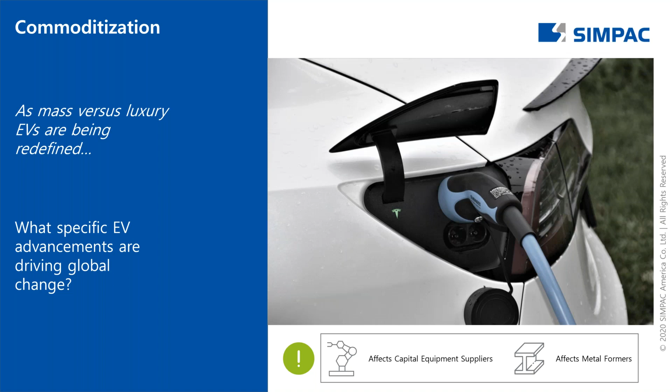Now that we've talked a little bit about how companies are working on different technologies to maintain and/or increase their profitability, we'd now like to discuss the commoditization of the EV market and what specific advancements are going to be driving this change.

GM currently has an EV Bolt with an MSRP of a shade over $37,000. Toyota, while not a complete EV vehicle, has a gas-electric hybrid. It's called a Prius, and it runs around $28,000 to $34,000.

Now, quite honestly, I use the example of Toyota more so because my cousin, who lives in Arizona, owns a Prius, and he told me that he's already driven over 300,000 miles on his car, and he quite literally only puts gas into it about every 3 to 4 months.

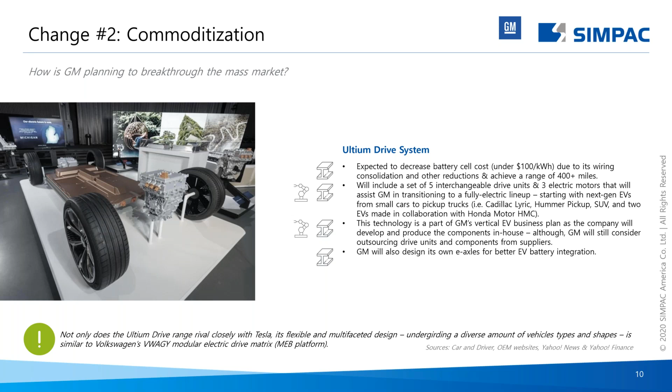So the next point we'd like to talk about is production ramp-ups. And yes, here's where we talk a little bit about Simpac and their press technologies related to the EV market. This section is important to me, obviously, and hopefully is as well for the metal forming industry, as we will now discuss a little more about how the stamping market will change over the next 5 to 10 years because of the changes that are happening to the EV market.

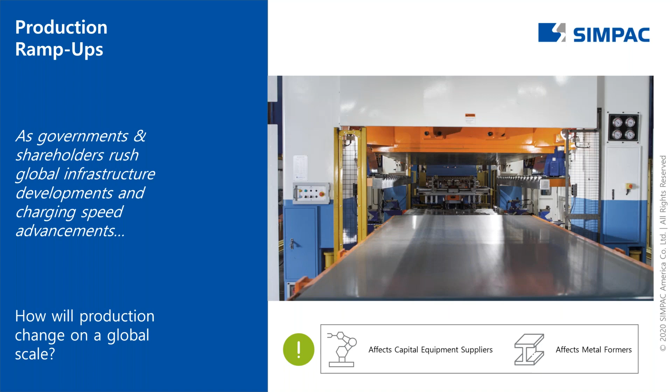Now, before we start talking about the production ramp-ups that are and will be happening everywhere, I'd like to take a minute and recognize our partners at D&S, located in Hastings, Michigan. Mike Stout, president of D&S, was nice enough to give us a quote as to what he sees in the market when it comes to the future needs of the stamping industry, not only for the EV market, but for the overall market as a whole, especially when it comes to stamping of higher strength materials and/or aluminum. Now, once again, I'm going to take a small break here so you can read Mike's quote.

Also, one thing to note, in a couple slides here, we're going to talk about larger presses and press lines. Due to space constraints, one of the larger presses that we're talking about is obviously Simpac's next generation SV4P2000 servo press. And that you see as a picture right next to Mike Stout's bio.

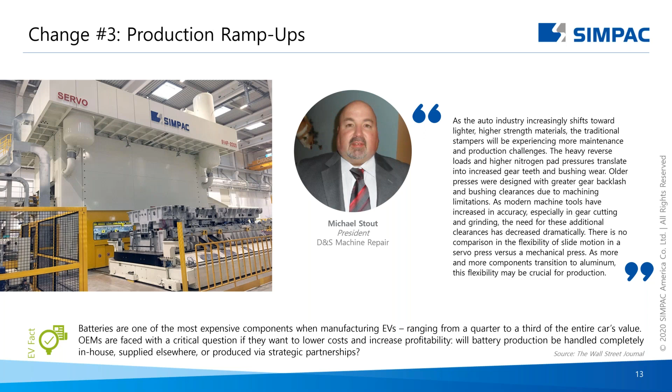Due to NDAs in place, we're obviously not at liberty to discuss who has purchased these lines or how many have been purchased by whom. But we are able to say that since our first webinar, the number of what has been purchased for the North American market has been considerably larger than anticipated or, for that matter, expected. And the standard line mix that we're seeing is ranging from 300 to 500 tons for a press line.

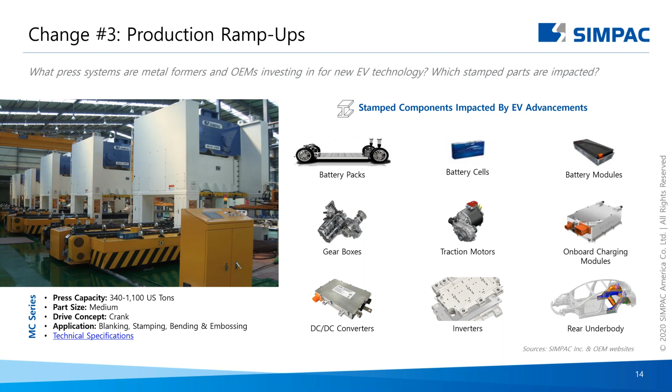However, many companies are using a different model, a hybrid model, by stamping higher and higher strength materials and/or aluminum. And as such, higher tonnage presses, either as a standalone press or press line, are going to be needed. This then exemplifies the need for either standard mechanical or servo-driven presses to accommodate these existing and/or future needs.

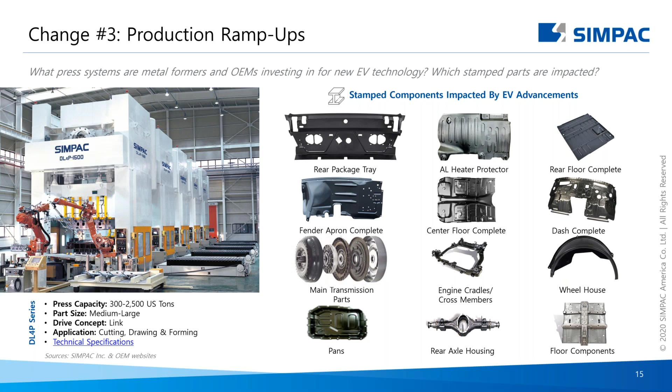Now that we've talked a little bit about what types of presses companies are currently purchasing from Simpac for the North American market, we also want to highlight some of the OEMs, either automotive or battery, and what they are doing to be able to ramp up their production in order to meet future demands. First, let's talk about Tesla. Elon Musk is hoping to eventually produce 20 million vehicles per year globally. In order to do that, he started to work on putting multiple things in place.

Expanding on our first presentation, GM's commitment to invest $20 billion over the next 3 to 5 years in EVs, we can now see where some of these monies are actually going. $6.7 billion is going to either upgrading existing brownfields or building greenfields over the next 2 to 3 years. We have the potential purchase of an 11% or more stake in Nikola. The dollar amount and percentage of ownership is obviously still TBD, and hopefully things will become clearer by the beginning to mid of December.

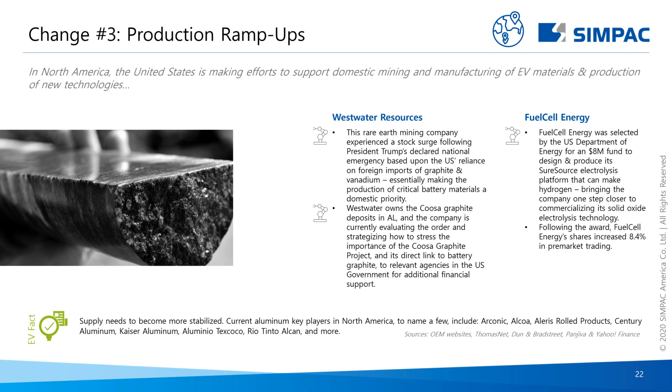Now that we've touched on some of the different types of production ramp-ups we can expect to see in the coming months and years, let's talk a little bit about the sustainability and eco-friendly processes that we can hopefully expect to see with this shift to EV. Now, even though we only have one slide allocated for this section, this is by far one of the most important sections when thinking about the EV market and to a greater extent, energy independence for North America.

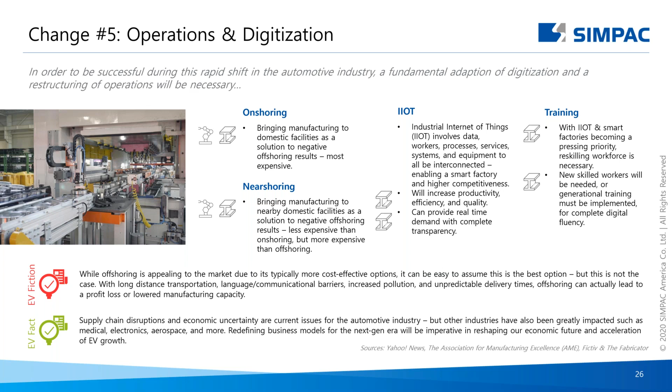Sorry about that. Let's first talk about COVID-19 and what this has at least taught us here, or at least myself, at Simpac. First of all, we had multiple buy-offs that were happening in Korea during the beginning of the shutdowns, obviously March through June of this year. As such, we weren't able to be on site with our customers to review the equipment for buy-off. This forced us to focus solely on a non-human interface/interaction in order to make sure everything was properly bought off before being shipped to North America.

Now, to say this was a challenge is definitely an understatement, but we succeeded. And with each new buy-off, we have become more and more efficient. Now, what does this have to do with the younger generation, you might say? Well, Generation Z and the Millennials account for 48% of the current workforce, and that is only going to increase over the next years. These generations are more tech savvy and more inclined to look outside the box when thinking

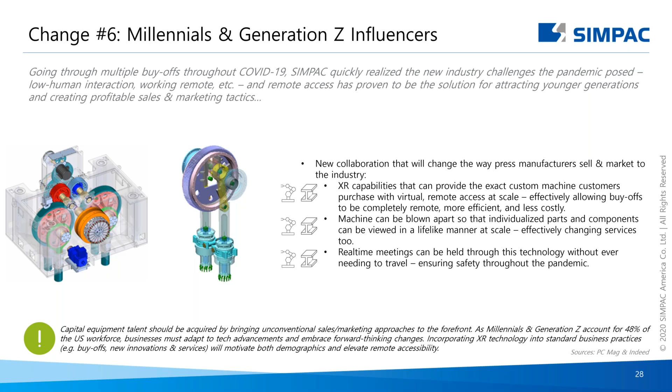We at Simpac understand we're definitely not perfect, but we also know that we do not want to follow, and we are certainly not going to get out of the way. As such, we are looking forward to leading with the next generation XR capabilities in order to better service our customers for the future. This will also provide more safety to our customers during current, meaning COVID, and future global disruptions that might happen in our ever-changing world. So that is our presentation.